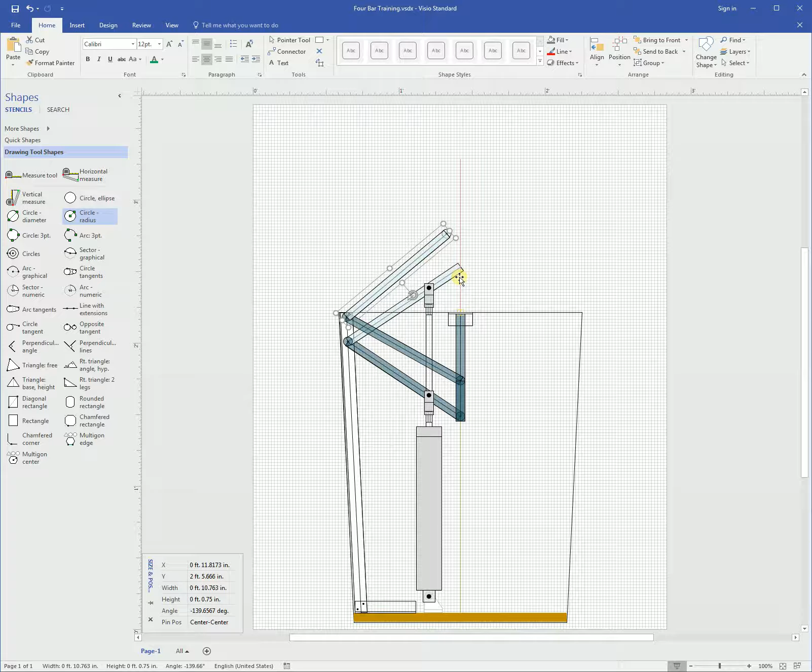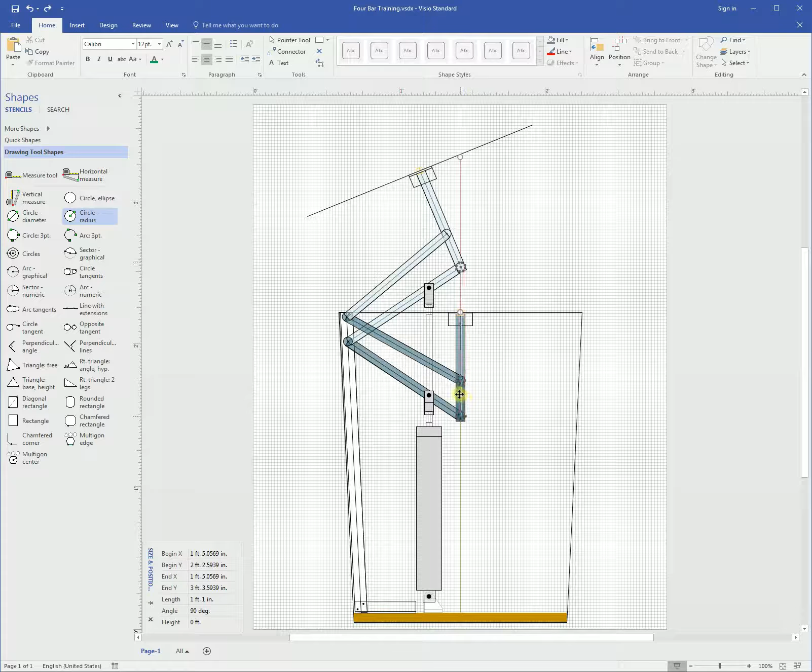Sorry, I should check something first. I know I wanted it to go up a certain distance and then tilt back a certain distance, and I just want to refresh my memory on what that was. So it's about a foot up, and this is 22.5 degrees, which is half of 45 degrees.

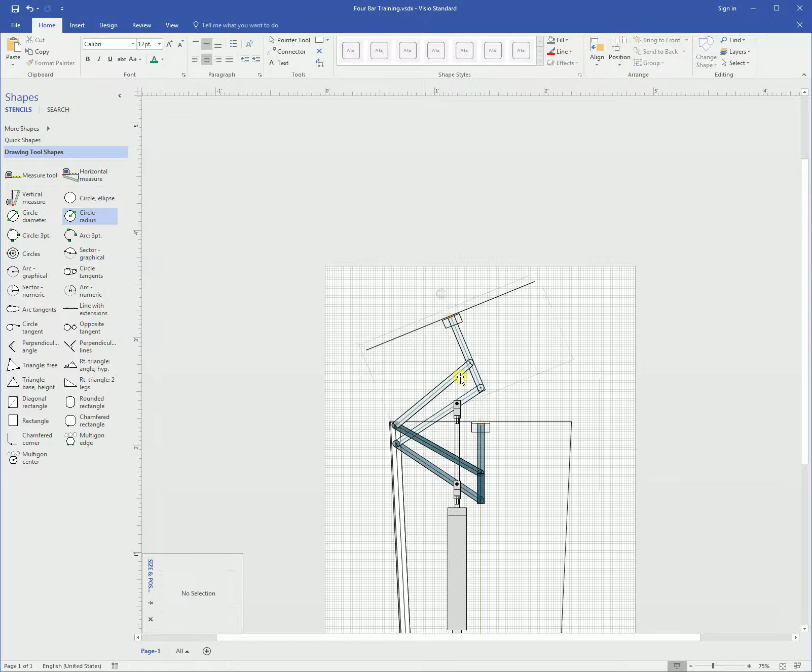Alright, so let me just set that little measuring line aside. I'm sure there's a lot easier way to do this with other CAD software, but I've been using Visio for such a long time that it's second nature. I'm going to delete the cylinder — we don't need to worry about that either right now.

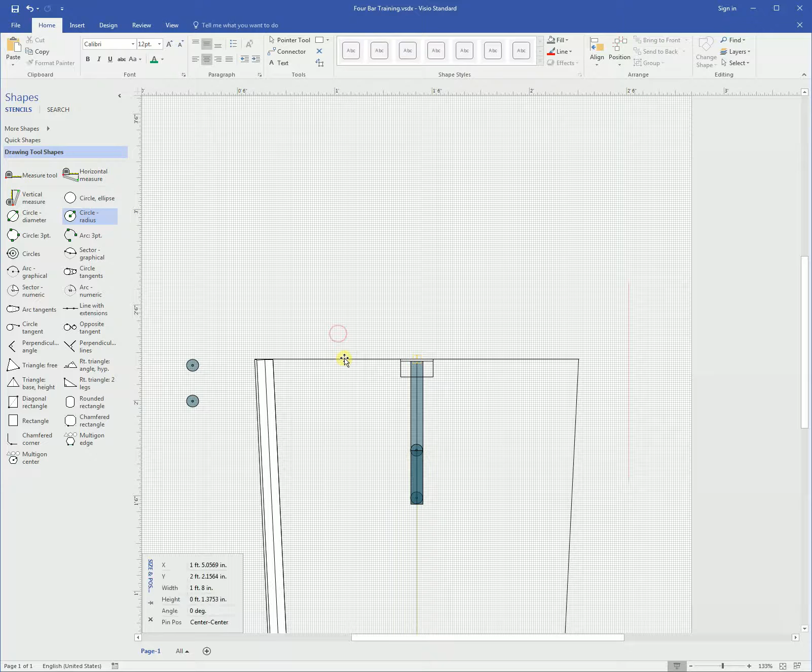Put my little joint guy over there, we'll need him. Okay, so this is the lid — it's an oversimplified representation of the lid. The lid's actually curved and this is actually longer, but it doesn't make any difference.

So I am going to combine all these parts into just a single shape. I'm going to group them. So now we have another lid and rod. This connection is at 90 degrees. There are two screw holes here, so this little mounting plate and this piece of aluminum bar stock are fixed — they do not rotate, they're just one continuous piece, pretty much.

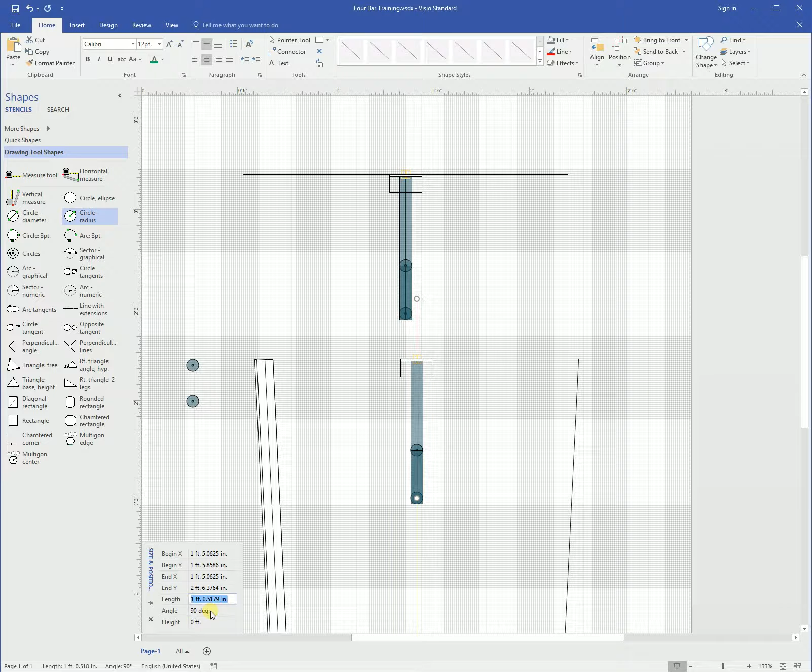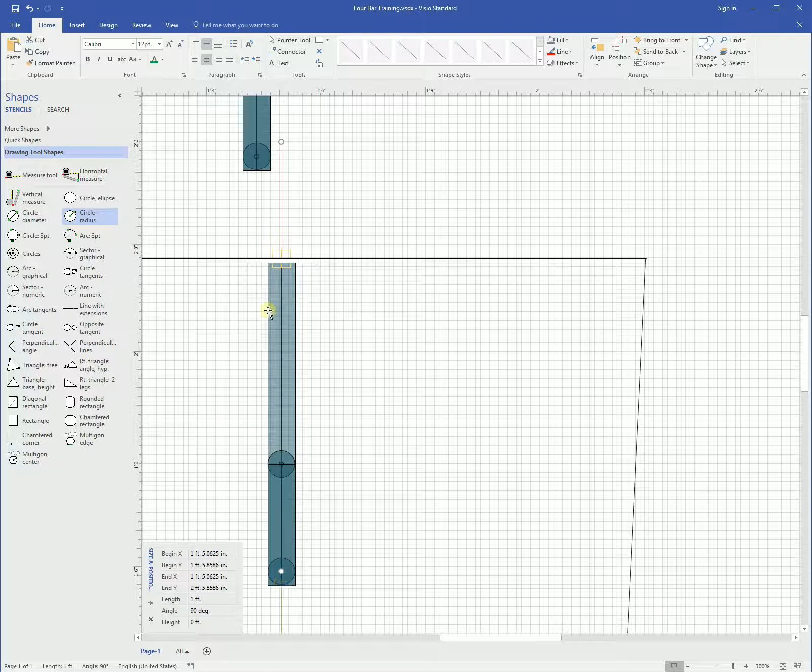Alright, so I said I wanted to go up about a foot. So let's make a line about that big. And then that means I want the bottom joint to be — excuse me, I've got to turn something off — I want the bottom joint to be 12 inches above the starting point. So we'll put that there.

This is where Visio gets a little awkward. Sometimes I have to turn off snap in order to do precise positioning.

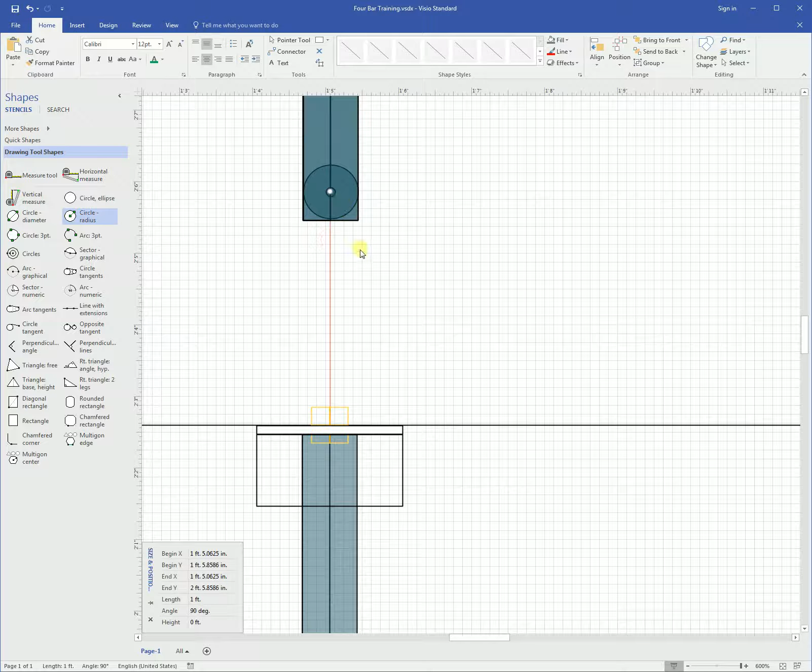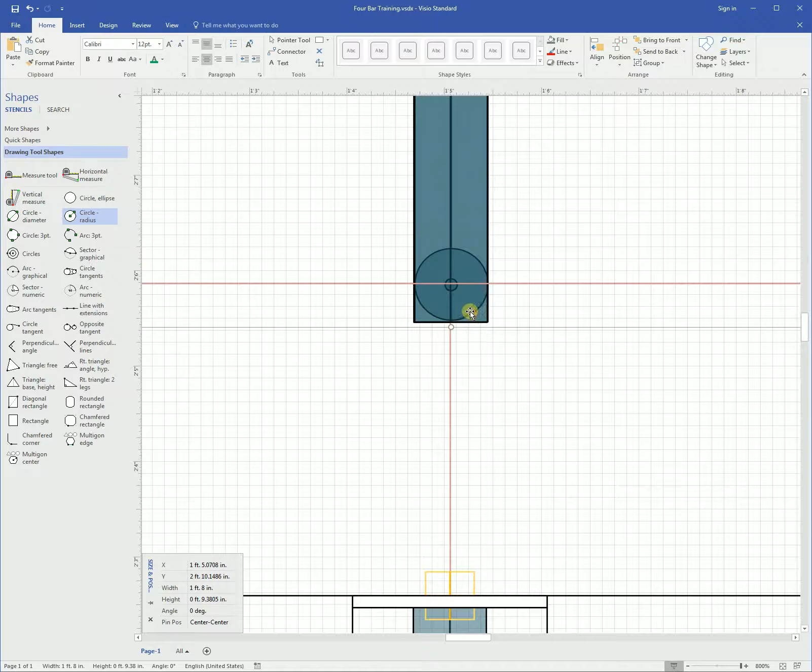Basically just trying to position this piece where I do want it to end up. It probably doesn't have to be perfect for the purposes of this — it actually looks fine.

Okay, so it's now 12 inches up, and now I want it to be 22.5 degrees tilted. However, that still needs to be in plane with the...

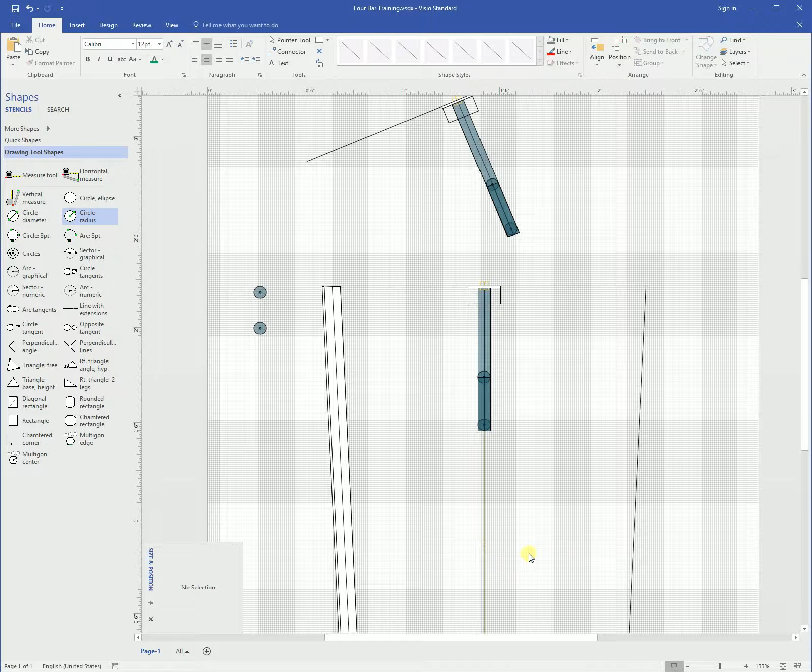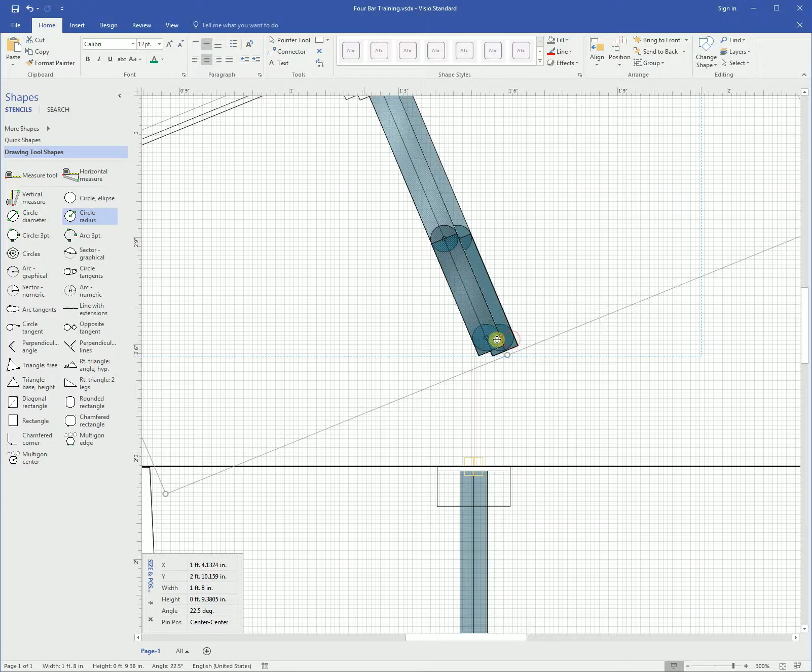It turns to black when I'm zoomed in. I don't know what that problem is with Visio.

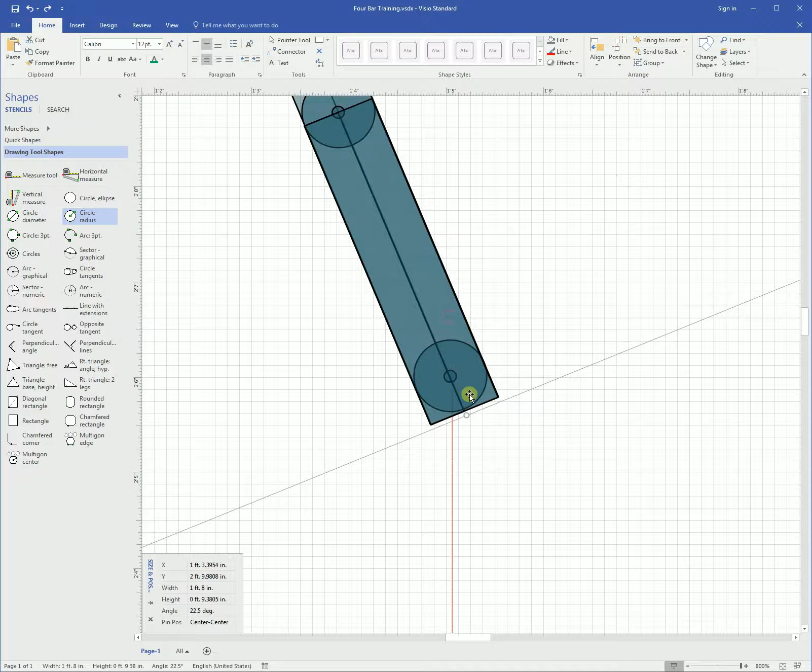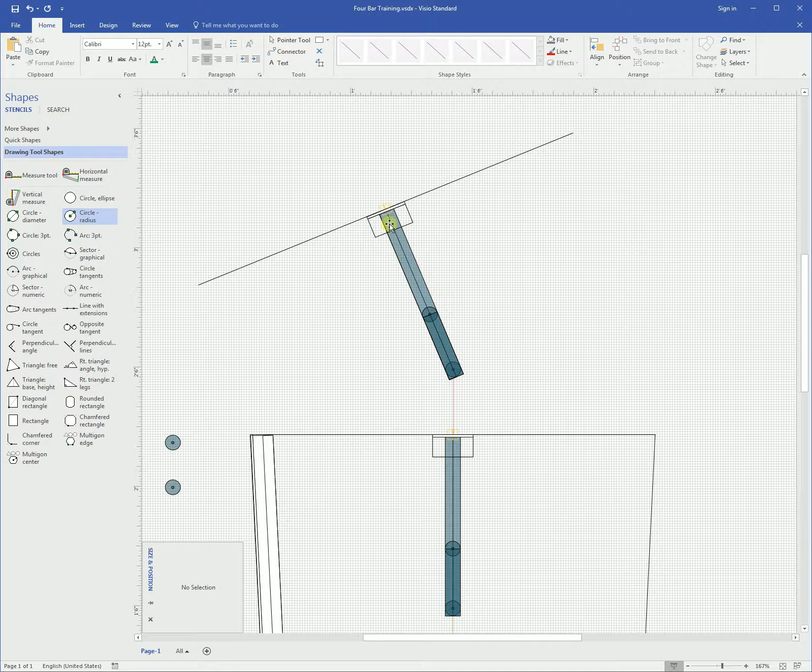Okay, close enough. So again, that was pretty much like the way the drawing looked when I first opened it, just showing you how I got this piece positioned. It's 12 inches up while the whole unit is tilted. This is what I wanted - the trash can lid up 12 and back 22.5 degrees.

Alright, so let's start. I'm going to turn off grid lines because I think that's not so tight. Just make them 1 inch.

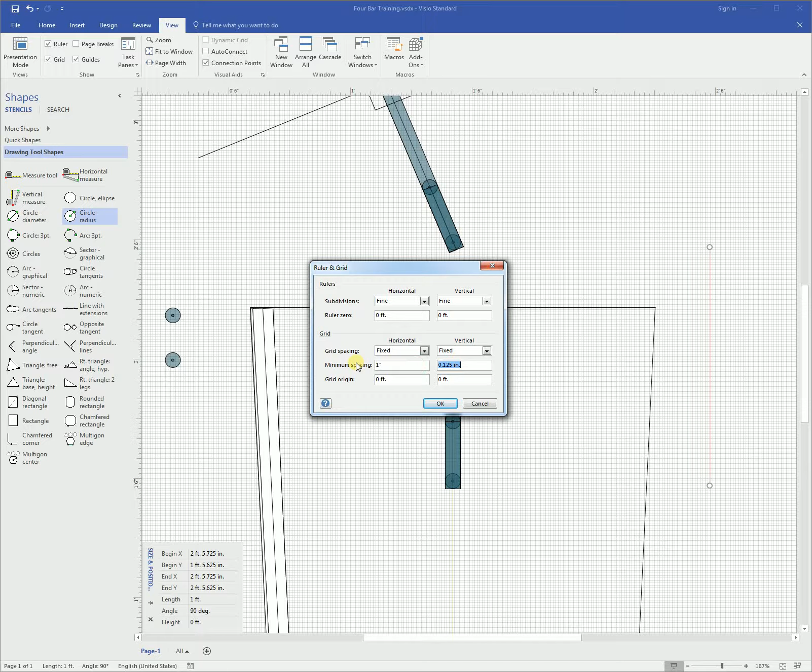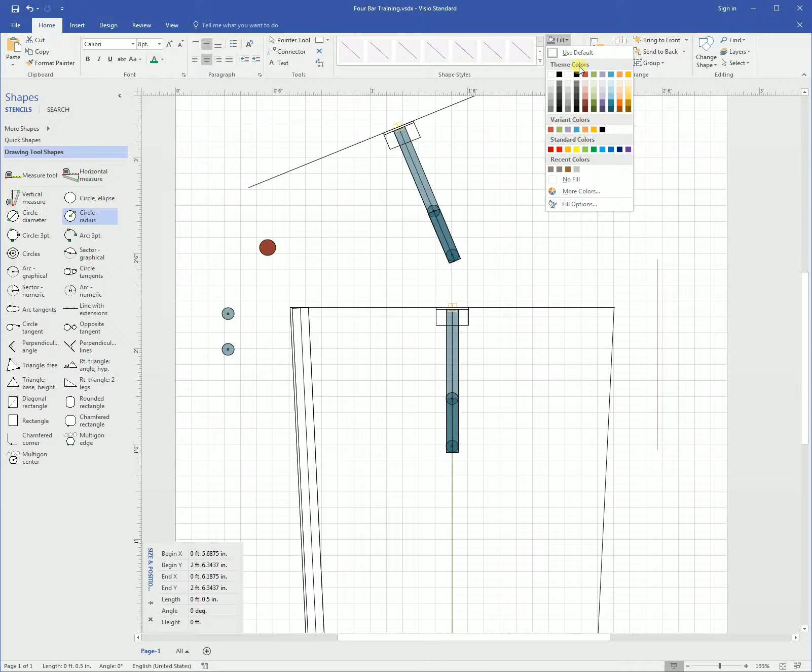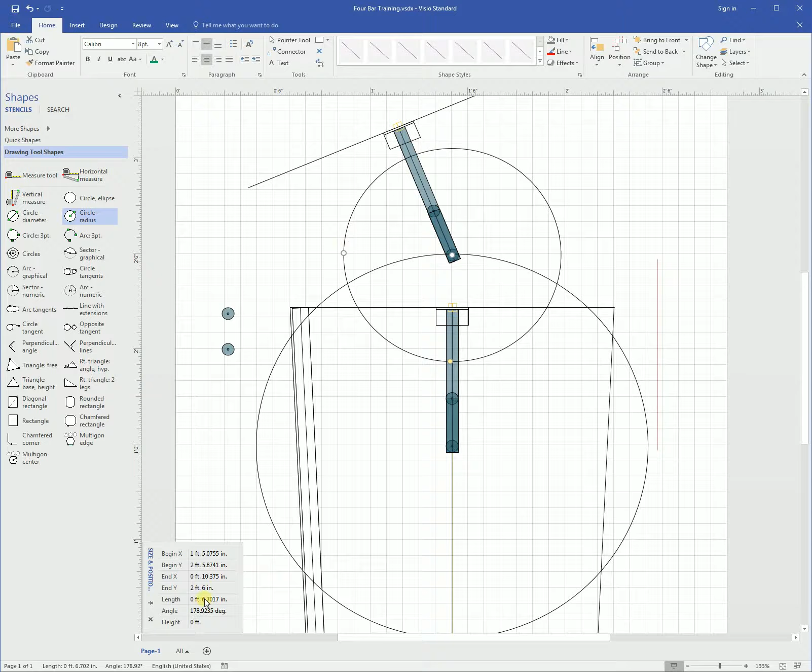Okay, now we know the starting position here and the starting position here. So the way you design your 4-bar linkage to figure out where these two joints go on the other bar is you draw two circles of the same size and center them on those points. No fill, and I'm gonna want snap on because that'll help me connect. So center of that's the destination, and center of this is the initial position. We want to make these the same size, so let's make them 8-inch circles. So now they're the same size, these two circles.

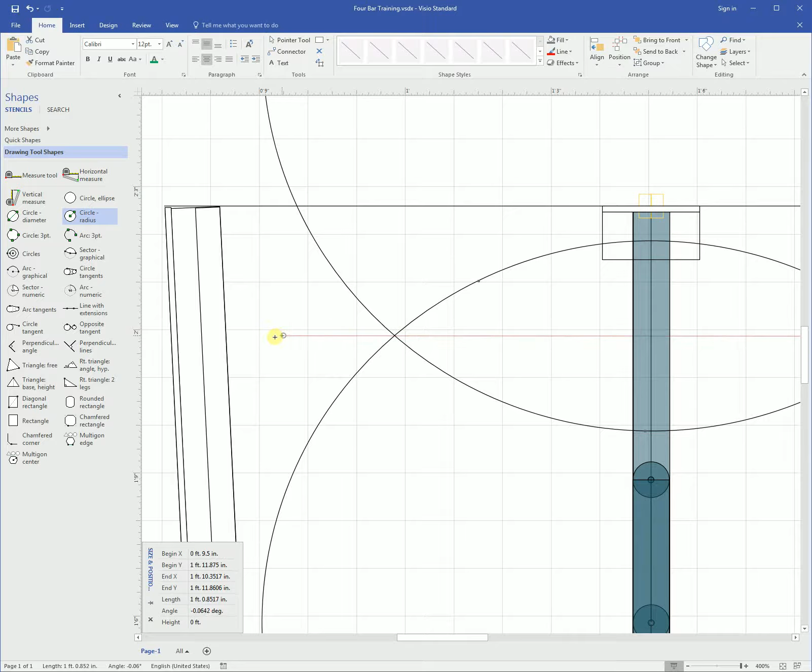And what you want to do is draw a line on the intersection of the circles - the vertexes, I think this is called. Where that touches is where I want my first joint. So I'm going to put this little guy there.

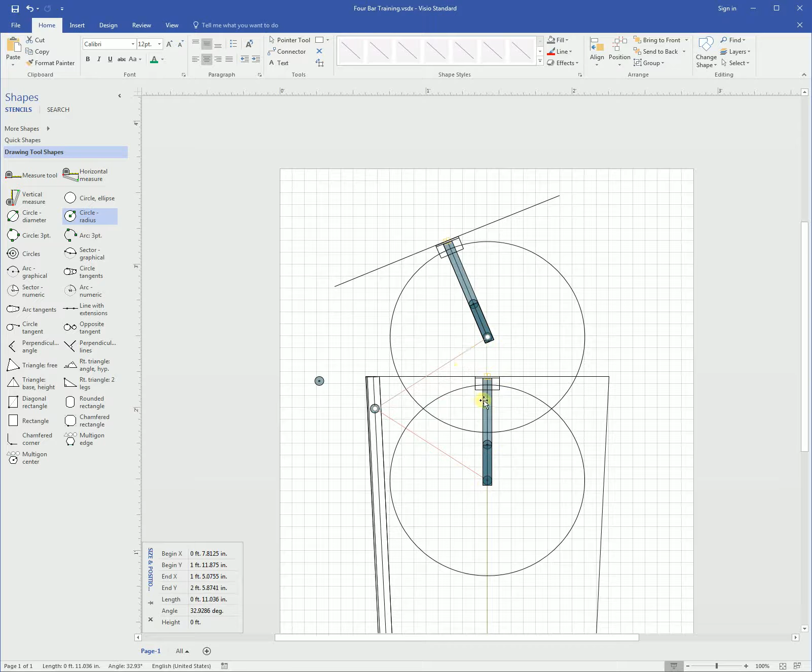Alright, so let's take a look at that. So if I had a bar, it's 11.03 inches there, and that would be the same length there. Okay, so that's the first bar. And you can check the rotation on the bar with another circle.

I don't need all these circles right now. Let's go over here. And where this circle touches the center of that joint, it should also touch the center of this joint. So you can see that that bar will move correctly on its pivot point to get from this position to that position.

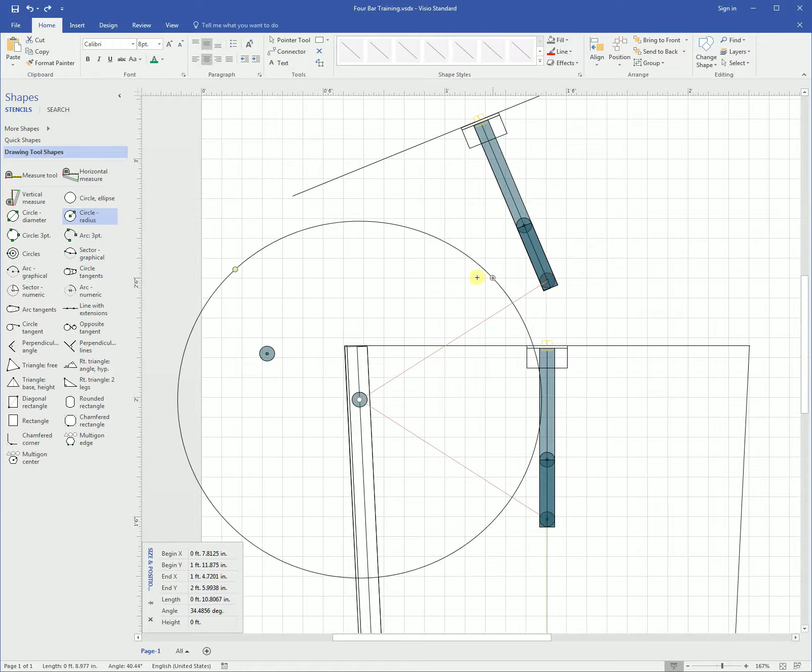Now, I know that the drawing already shows the second joint's position because I figured them out, but let's just say I hadn't - what is going on here? Let's say I know that I can't have a joint any higher than here because of the top of the trash can. I don't want the joint for the upper bar to be poking up above the line here.

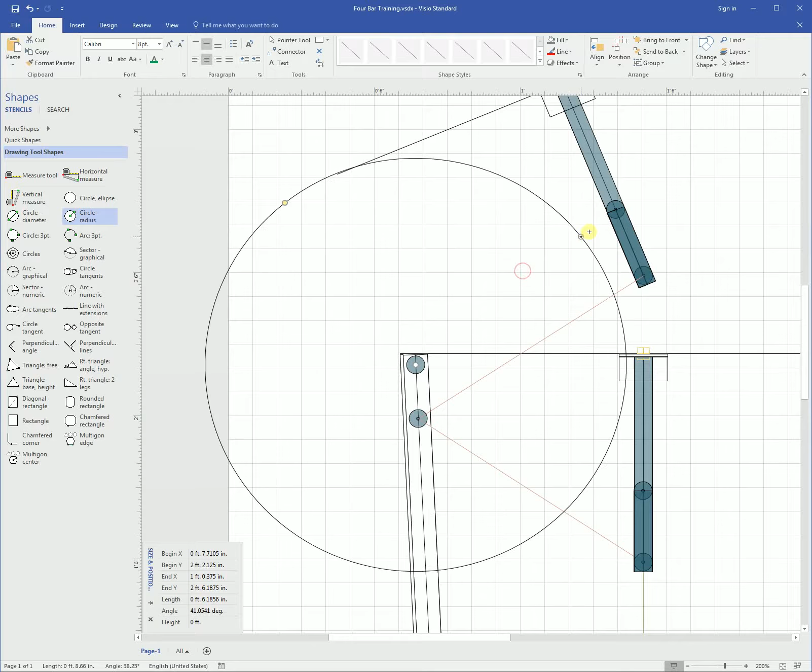So one way I could find roughly that spot on the bars is just to draw a circle out until it intersects the same spot on both. So I know that that would be probably roughly where I would go.

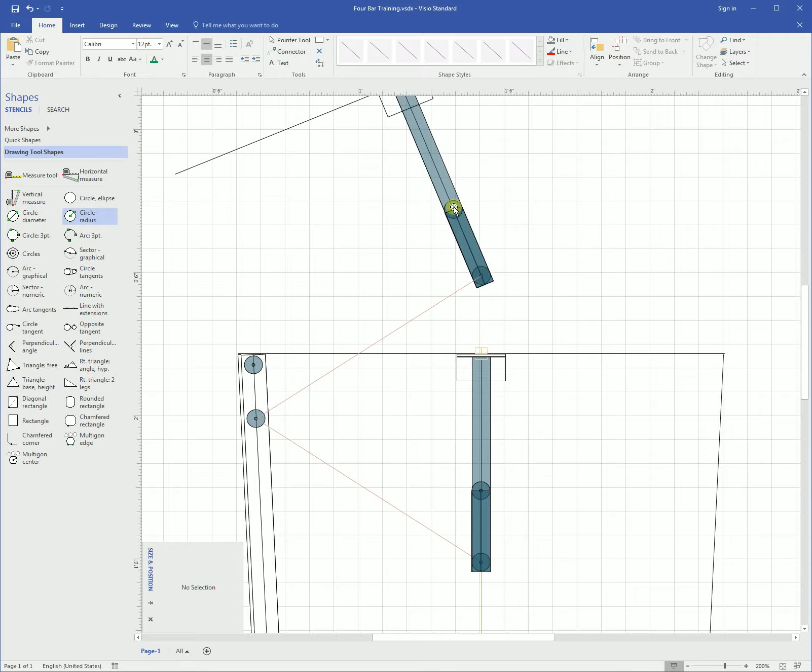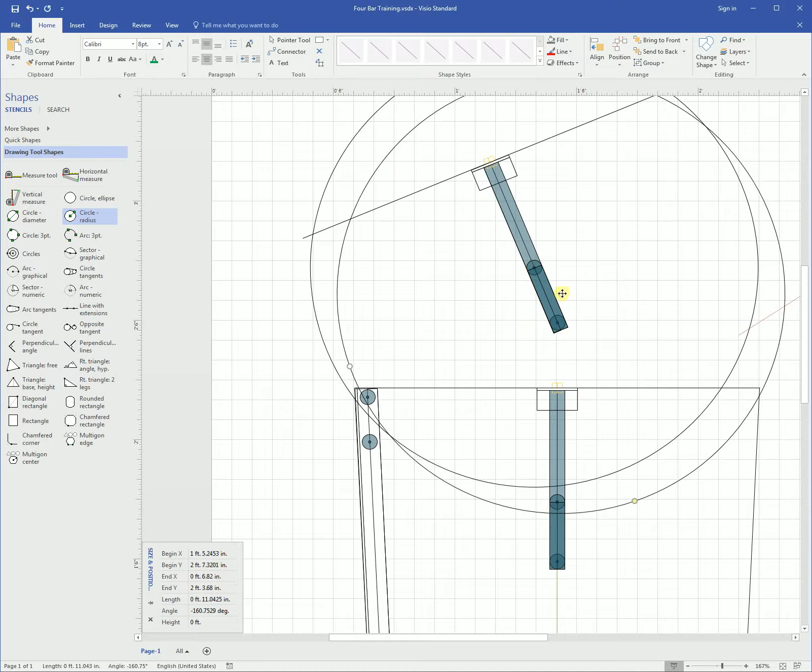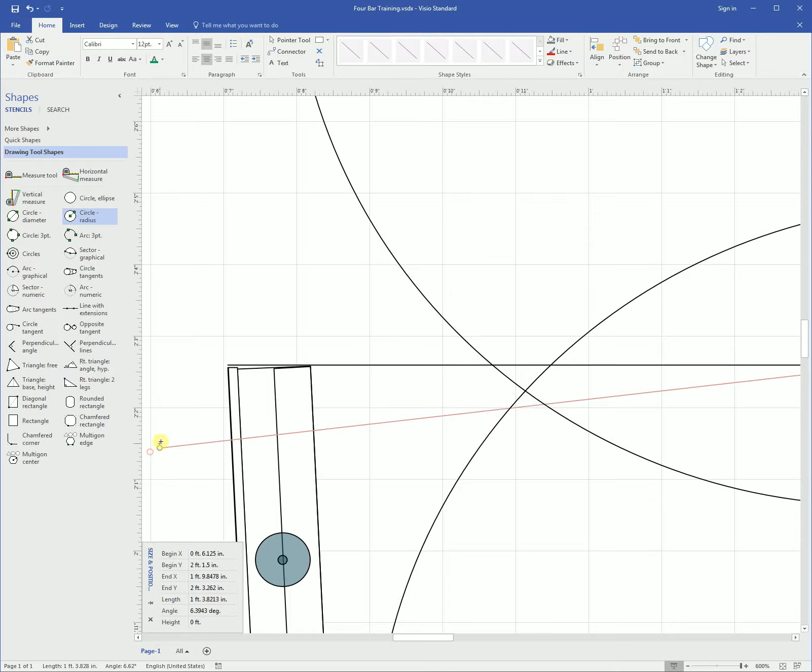Anyways, I had already figured that out. So again, these are the two joints on the bar in its final position. Just bring in that circle again - another circle, make them the same size - and then through the intersection of the two circles, let's get this guy that way. I'm sure I didn't put him exactly where he was supposed to be anyways. So right through the intersection would mean that this guy goes here.

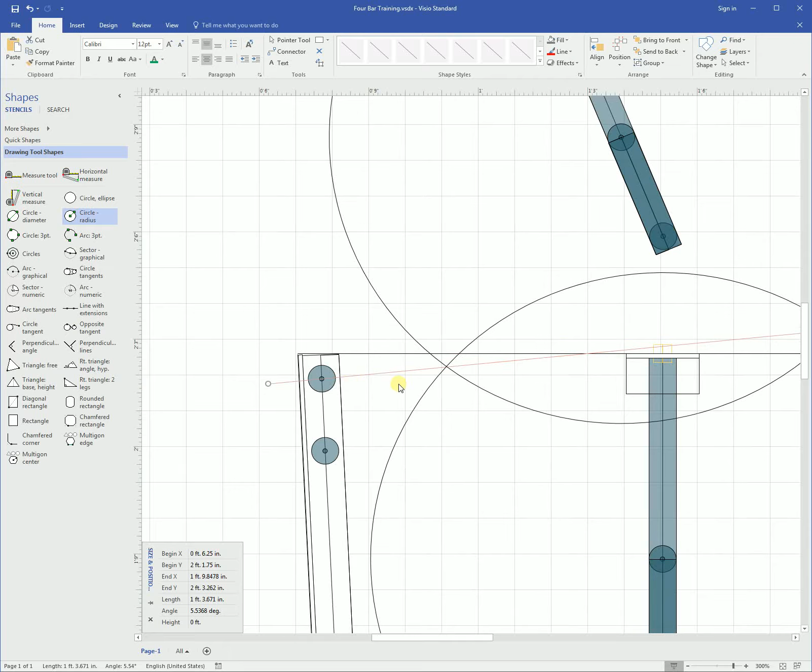And is Visio's snap getting in the way? I'm just going to turn it off. Get it right on the center. Again, this doesn't have to be exact to the millimeter. Even when you drill the holes in the aluminum bars, you're going to be off a tiny bit, but the prop will have the desired movement. Okay, so let's turn snap back on.

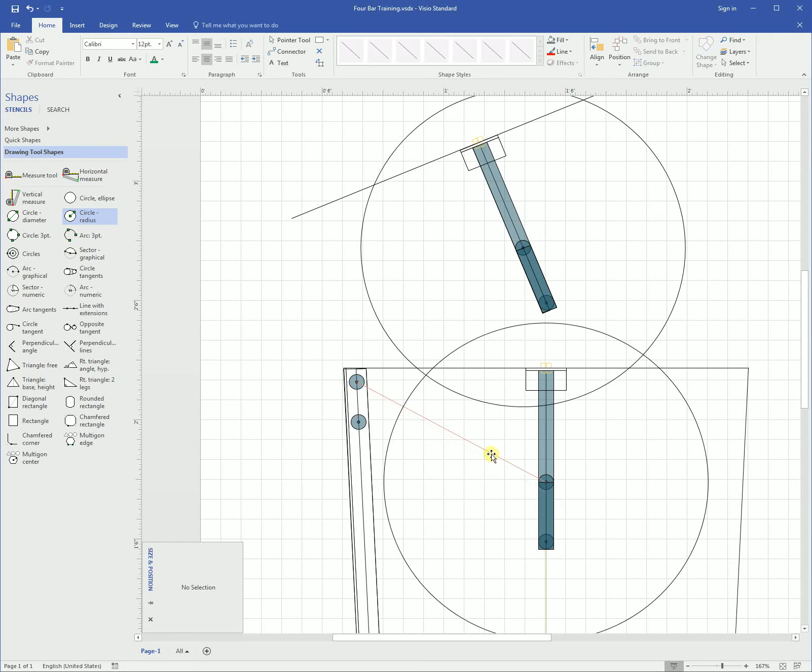From here and to here, this is the upper bar, 10.6, 10.6. If you want to check it, take a circle and put it here, bring it out to there, and you see it goes through the center of both joints. So whatever bar has this is moving again in a perfect circle on its pivot, the upper bar there.